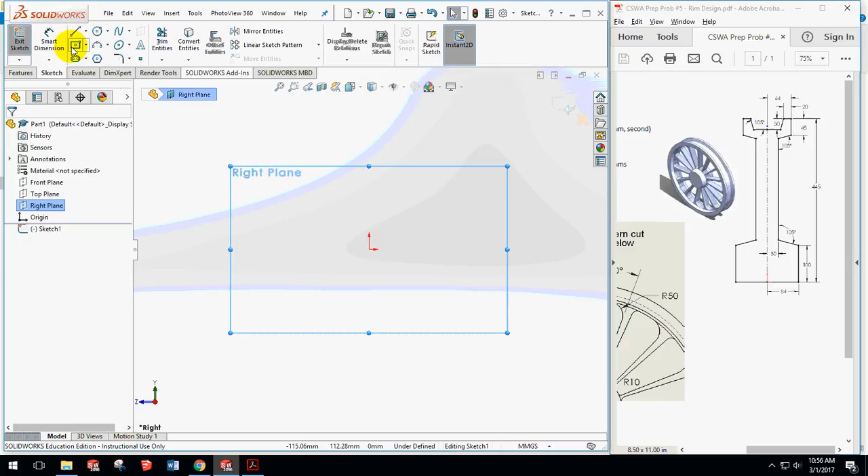Starting out, I'll start in the right plane and just start a sketch here. It's going to rotate to the right plane like this. I typically will start with a center line off the origin, and we'll bring it up about, I'm going to zoom out so we get about the distance I want, about 445 or so. I'll push escape and then start creating this sketch following my example here on the right. Come on over, bring it up, and kind of create the general idea of what I want to do.

And come like this and go vertical, over, down, so mouse over this so it kind of has that intersection right there. Okay, so there's the main sketch.

I'm going to go ahead and smart dimension the largest dimensions first, and this is going to be 445, and I'm going to go with 84 here. The distance from here to here is 30, and this is 100 for this one.

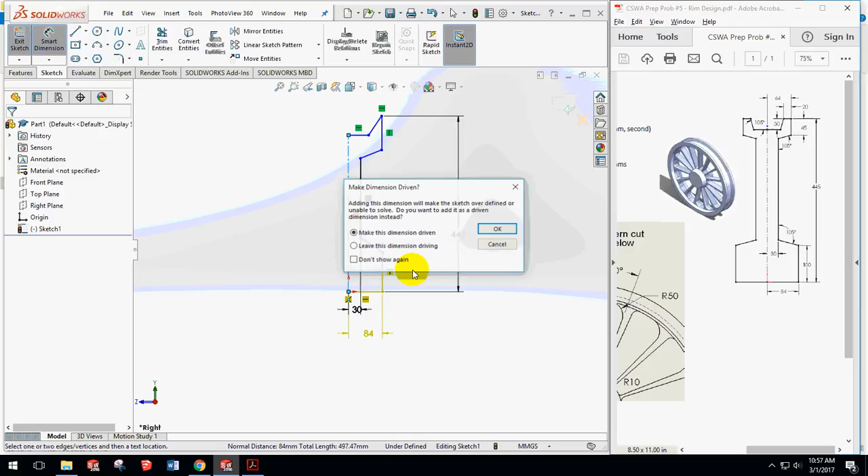So I'm just kind of moving up. There it is, 100. And moving up, we'll go to 105 degrees from here to here. And then coming up, we'll do 105 again to these two. Show it right there, 105, enter. And this distance is 45.

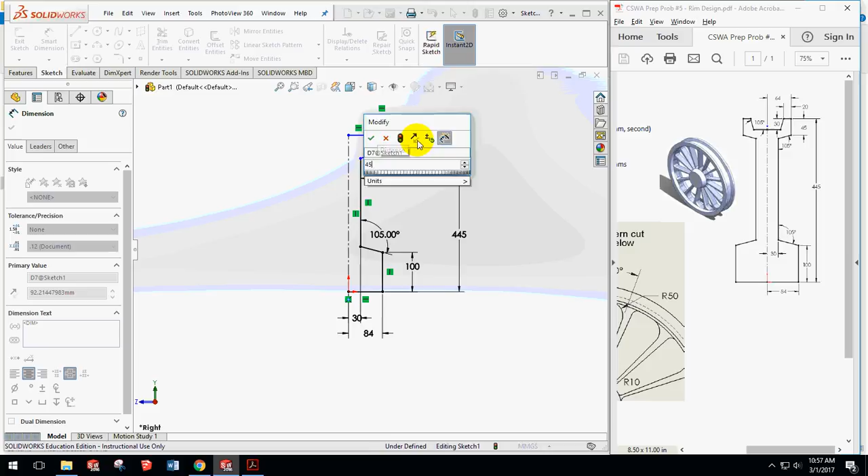Well, coming up, we have, this is 30. Push escape and drag this over a little bit so I can see that. And then smart dimension from here to here. Try it again, go from this line to this line. It's going to be 30. And 105 degrees right here as it shows on this side.

This is going to be the same over here, so from here to here is going to be 105. There it is. Push escape, bring that a little bit out. Looks like I need this to be 20 for this one, this edge here. Push escape.

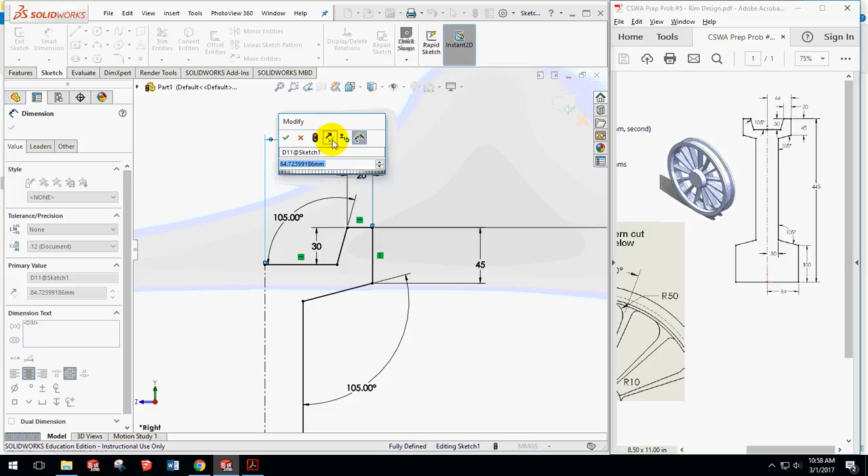Looks like I'm missing the 64 right there, across from the center to this edge. Bring that up to here. Okay, so everything is now black, it's defined, as it says, fully defined down here. Push the F key to center this, and I'm looking at all my details here to make sure everything's set up and correct.

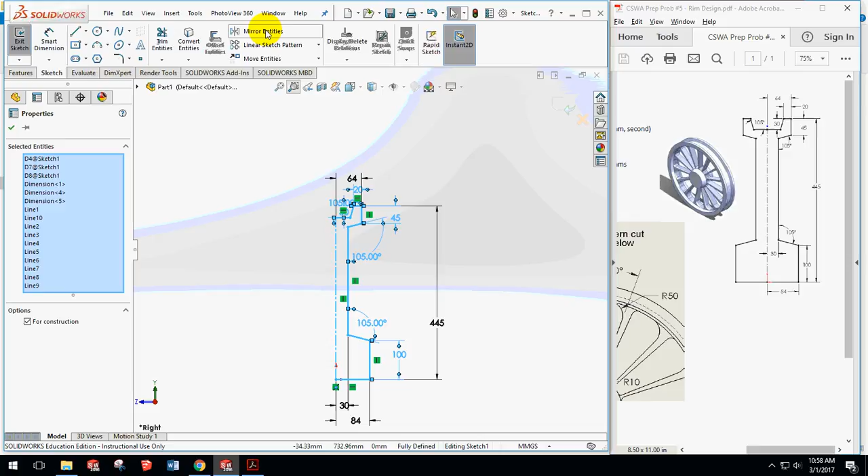When I have that done, I can exit my sketch, and actually let me go back into that and do the mirror right here. So I'm going to grab the entire sketch, go to the mirror command or mirror entities, and it already, because it sees the center line, it automatically makes the mirror for me. Exit my sketch. I'm going to go to the Revolve boss base command now, and I'll select the axis, which is the bottom line, and that makes that the revolve. There's the shape I want. Check mark that, so we're good.

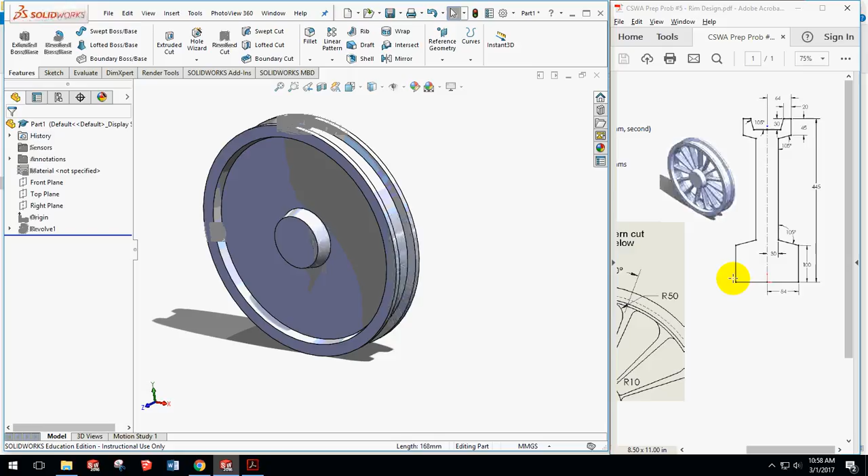There it is. I'm going to go over here and just show plain white, and it's a little easier to see the details of that. For the spokes, I'm going to create a sketch here and then cut that through and do the pattern.

So I'm going to start a sketch actually on this surface right here, and you can see the origins on that surface. I'm going to bring it to Normal To, so I'm looking straight at that, and then I'll go ahead and start creating this sketch. Notice that this is 20 degrees, this is vertical, and the center or axis of this should be on the origin down here.

So I'm going to go ahead and start this by, actually I'm going to use convert entities to select this existing edge here and this one here, and then check mark those. That creates a sketch right there for me. Sketch line, circle right there and right here.

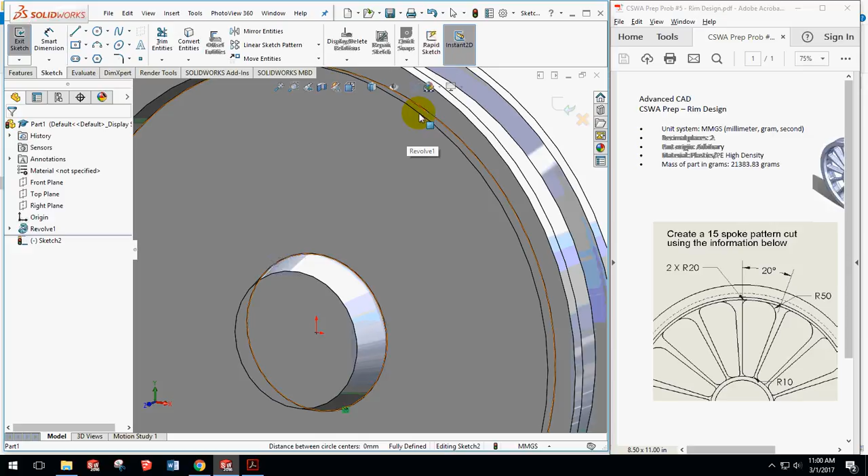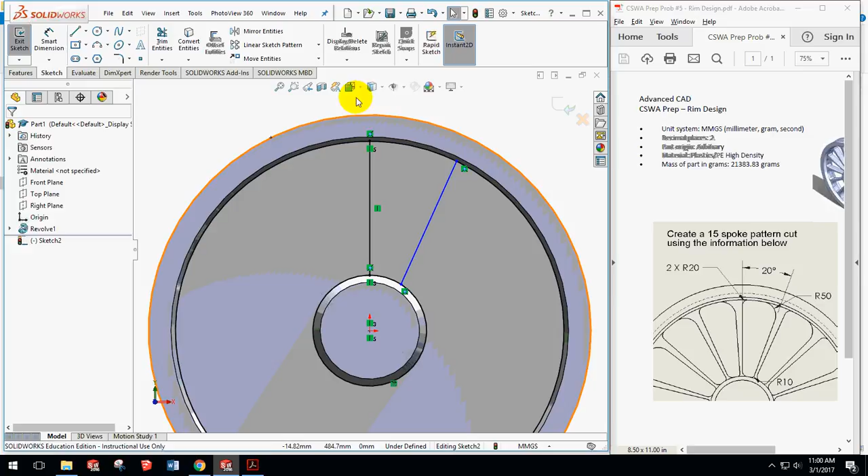Okay, so I'll go back to Normal To again, and then I'm going to create a line right here close to the origin, at that quadrant up to this one right there, and escape, and then another one from a random point to here, from here to here. There it is. From there I can go ahead and create, I'm going to go to a hidden line view just for clarity, so you see what's going on here. And I'm going to create a smart dimension between these two lines, because this has to be 20.

Alright, that's cool. I'm going to bring a center line down from here, from this line, to there. There's different ways to do this, but I like to see it as a center line and then this line I want. So I'll choose this line, use the control key, select this one, and make these collinear so they line up.

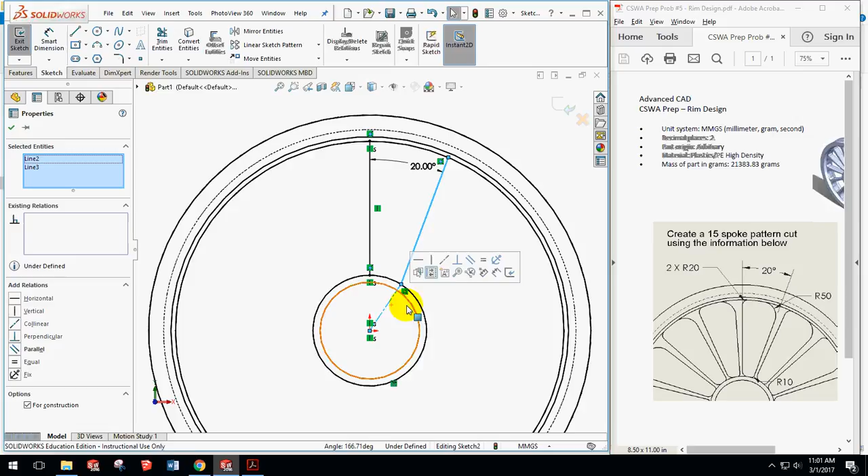Just for clarity, I'm going to do the same thing with this one. From the origin, this is going to go to here, and then these are both vertical and coincident, so they're in line. Now I'm going to use the trim command.

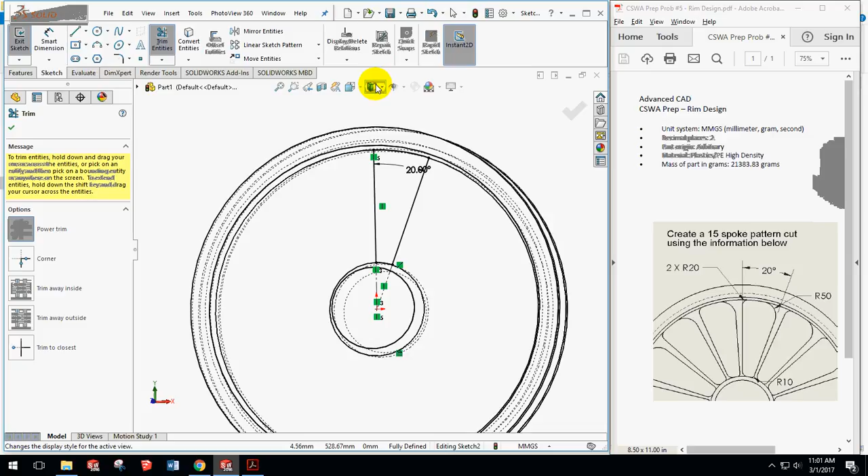A power trim means I just click with an index finger click and push through that line, cutting this off right there and right there. If I go back to a solid view, what I have then is that line representing the converted entity I created, and this line right there which I created and trimmed off by just pushing through that. Okay, so that's my sketch.

I need to have a radius of 50 here, radius of 10 on this side, radius of 20 right there, and then this is also a radius of 20 right in there. So I'm going to use a sketch fillet.

The nice thing about sketch fillets is that when you select, you can go ahead and set it. Let's say we're going to do the 10 radius first. I'll grab this vertex, click on that, check mark it, and change this to 50, for example. Then click on this one, check mark it, change it back to 20, push enter, and click on that vertex and this one as well, and check mark it.

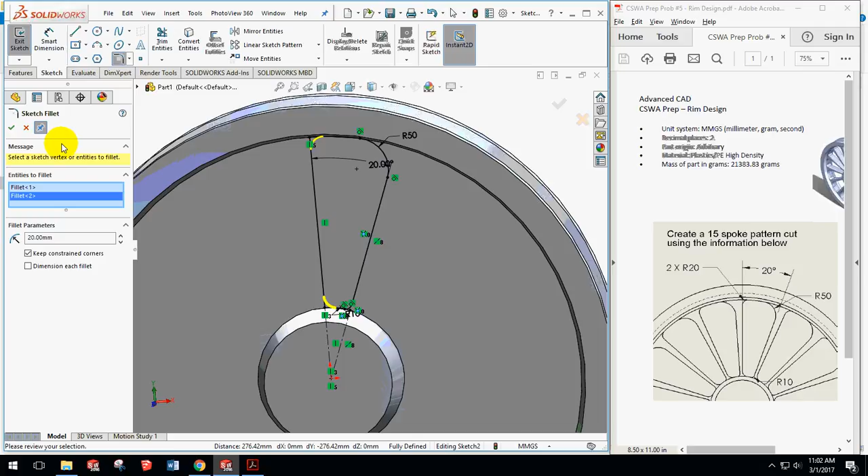What's cool about that is when you use the fillet option, it's an automatic tangency set up between the arc and the line, which we have to have. So this arc and this arc here are tangent, which is what we're seeing. These are already preset for us, so I'm ready to go.

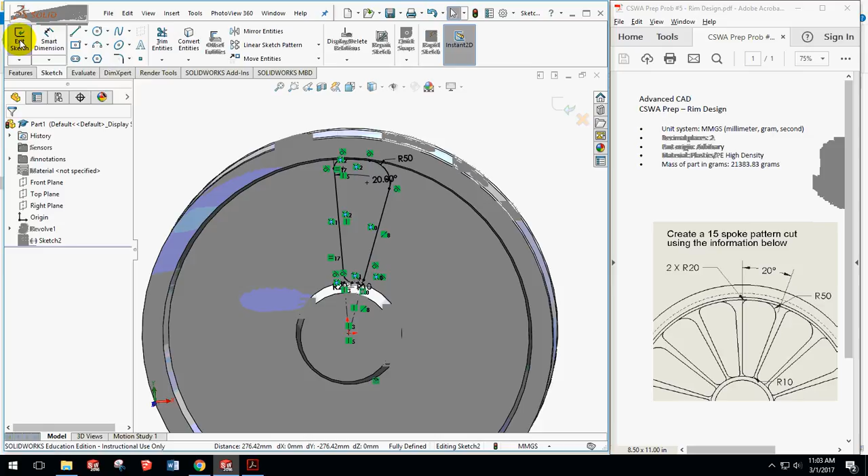Now I'm ready to go ahead and do my first cut. I'll exit my sketch, features, extruded cut. I'll go through all for that, so it goes through the entire part. Check mark that. There's the cut.

Again, it should be lining up with that edge right there, and it is. I'm looking to see if these are lined up with these two edges, and they're right in place.

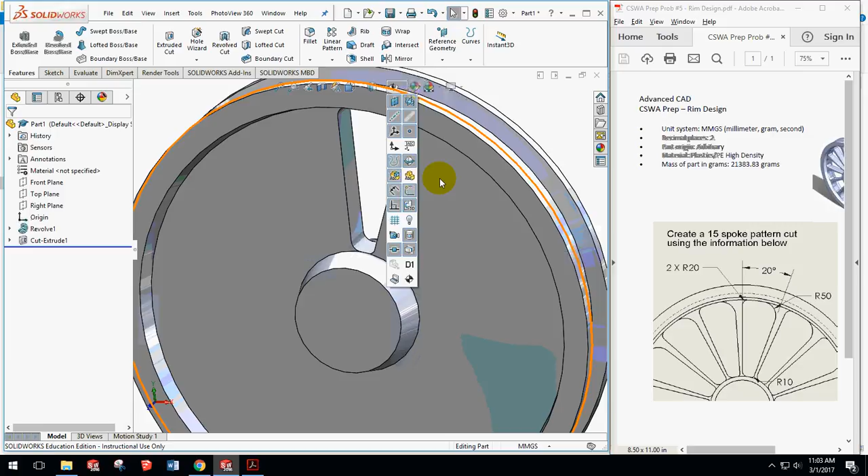Now I'm going to go ahead and do my pattern. To do a circular pattern right here, the first thing is I need to turn on temporary axis, which are in hide show items, right there. View temporary axis, turn that on, and I should have my axis for any cylinder or hole. For example, this one right here has axes for the radius centers.

Now I'm going to go to a circular pattern and choose my axis first, which is going to be the axis for the pattern right here. And then I know I need 15, push enter, equal spacing, and the feature I want is going to be this cut here.

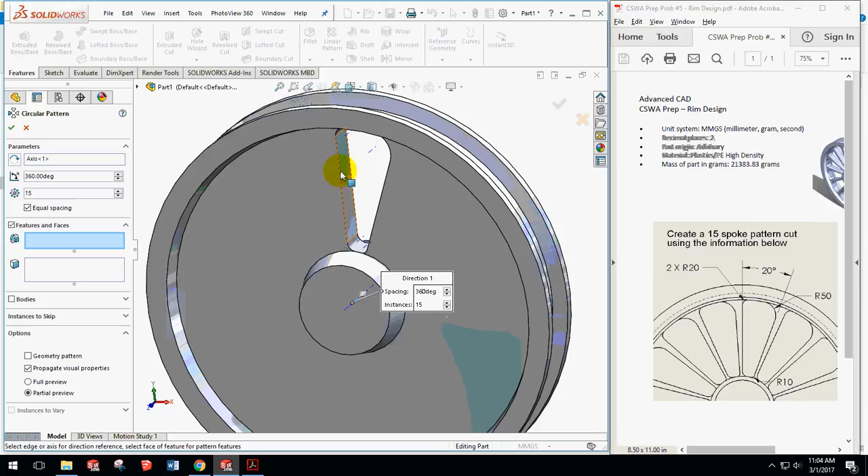I'm going to open this drop down list, go down to my extrude cut 1, and there it starts to preview it because I have partial preview turned on. Check mark that. I'm set. Looks like I have what I need. I'm going to go ahead and turn off the temporary axis to get those out of there.

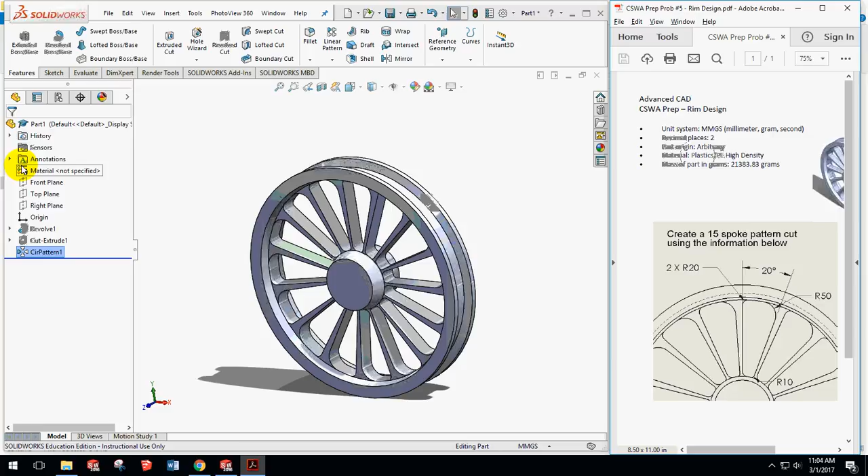I'm going to go ahead and change my material to plastics, and then polyethylene, I believe it is, high density. I'll right click on materials, add a material in plastics right here. There it is, PE high density, and we'll apply that and close.

If I did this right, when I evaluate it and go to mass properties, I should have the correct mass weight, which is right there. So 21383.83 is right on there. It is right there. Okay, so we're good to go.